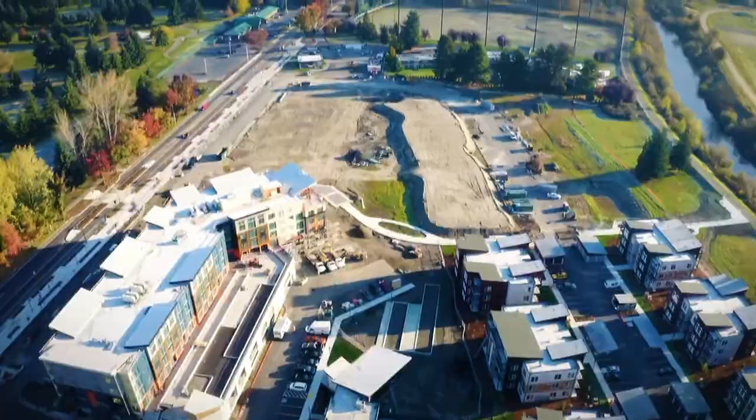Three items on our agenda tonight, and the first one is the Federal Way Link extension. Mark's going to kick this off for us. Thank you, Mark. Ready to go? Yep, let's do it.

Good afternoon, everyone. Mark Madfai, I'm a design engineering supervisor at the city and also one of the liaisons for the Federal Way Link extension. Derek Hawks is my counterpart, here in the audience, and we share that role. Derek is in charge of the KDM area and everything north of 259th, and my area is everything south of 259th, including the Star Lake Station. But I'll be doing the update tonight for both station areas.

The last update we did was back in August. So this will talk about all the progress that's been made since August of last year.

I'm sure you've seen this slide many times. It just shows the overall alignment of the Federal Way Link extension. Starts up at Angle Lake, where it ends now, continues south to Federal Way Transit Center, about 7.8 miles long, 12 minutes on the train. Revenue service opening, this says 2024, that's delayed now. I could talk about that a little more as we get into the presentation, but hopefully it's 2025, but we don't know.

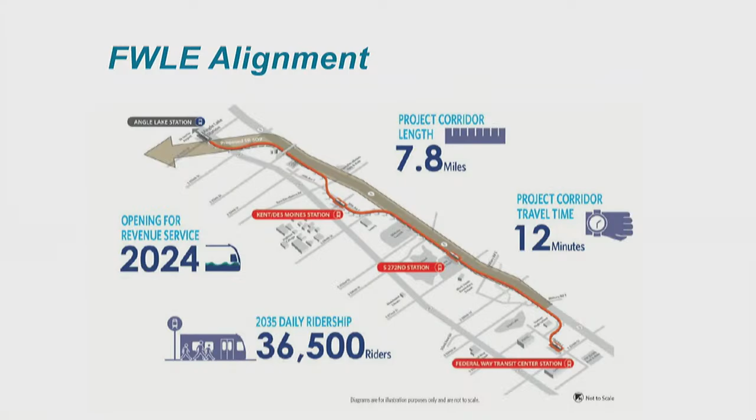Permit revisions. So this is a design-build project, which means a lot of the design and construction is done through permit revisions. Within the permit revisions there's many little design changes, and Derek and I look at those daily. They get packaged into one larger permit revision. There's been 895 for the entire project, about 253 approved for City of Kent so far, and those continue. There's 146 in design in Sound Transit's area, but those will just be continuing until the project is completed.

So I'll start with the Kent Des Moines station and garage area update. Utility work is done, concrete roadway paving is progressing, city streetlight foundations are being installed. The Structure B guideway, which I'll show where that is, the deck is complete, and the plinths and track are being installed. The plinths are the little concrete blocks that go on the guideway that the track is installed onto, which I have pictures of.

Garage railing, interior and exterior finishes are being completed. Framing for the exterior architectural cladding is on, and the canopy is nearly complete. It's got the awning on it, and the elevator shafts are being finalized.

This is just a conceptual drawing that shows the overall KDM station area. North is to the left. KDM Road is over here on the left. These are three new connecting streets between 30th Avenue and Pacific Highway South. There's 30th Avenue, and there's Pacific Highway. And the station area is right along here, along 30th Avenue, and then here's the garage.

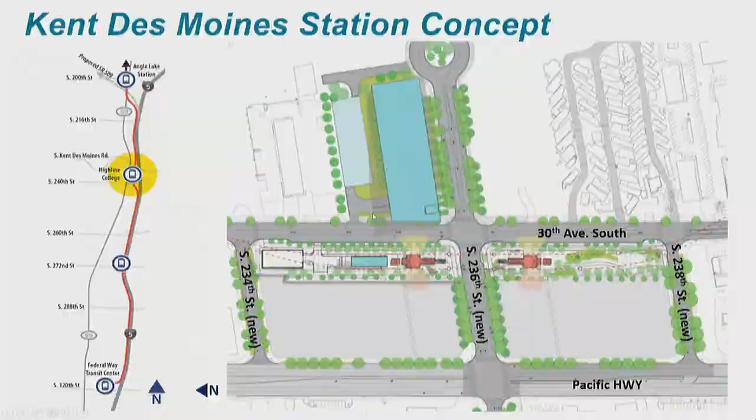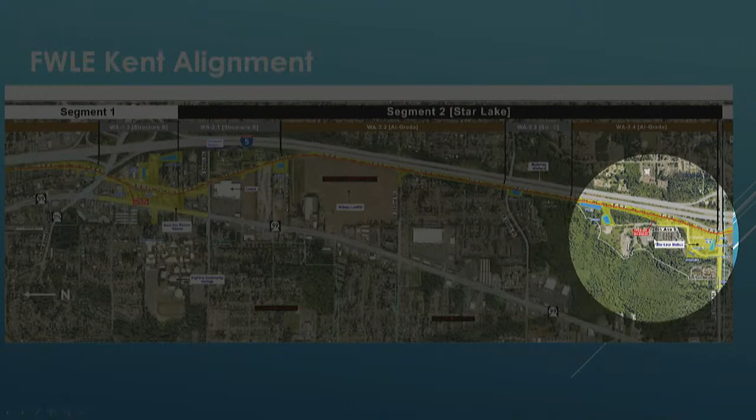This is more of a representation of the Federal Way Link extension through the City of Kent. So this is Kent Des Moines on the north end. Kent Des Moines Station is here, continues down to 272nd. Star Lake Station is right there. And this is Structure B, the elevated structure that goes from Kent Des Moines Road south to behind Lowe's and then up to the Midway landfill.

This is a good before and after shot of the guideway looking north towards Des Moines. On the left was back in August, on the right is January. They've got the plinths, the concrete little blocks, showing up here. On the right side you can see the rails attached to those concrete blocks. Those are installed. They've got those most of the way along Structure B. Track is installed, I think, through the station area. They're getting about 300 to 400 feet of plinths installed per week, so they're making good progress there. The rail is welded in about 80-foot lengths together into about 300-foot long sections, and then they roll it into place with some special rollers. I've not seen it, but it's a pretty big operation.

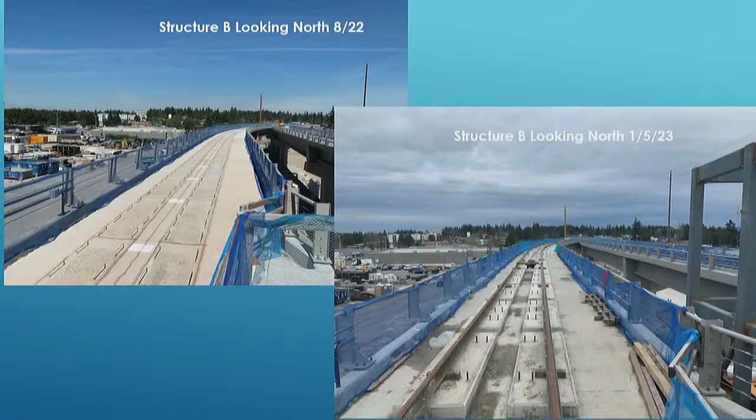There's looking south to the station area. You can see the difference between August and January. They've got the canopy up, all the framing up for the canopy on the approach there.

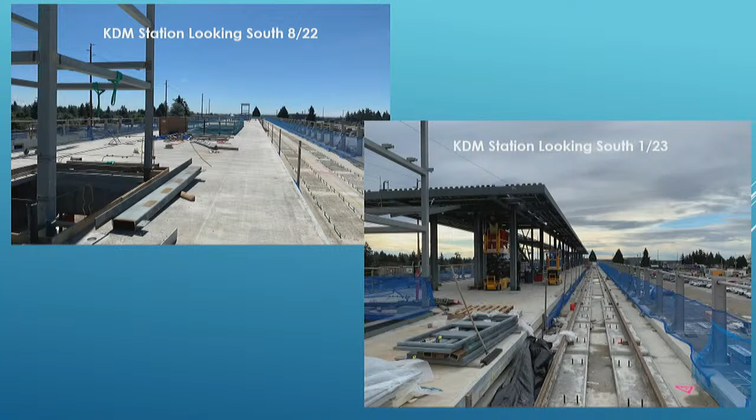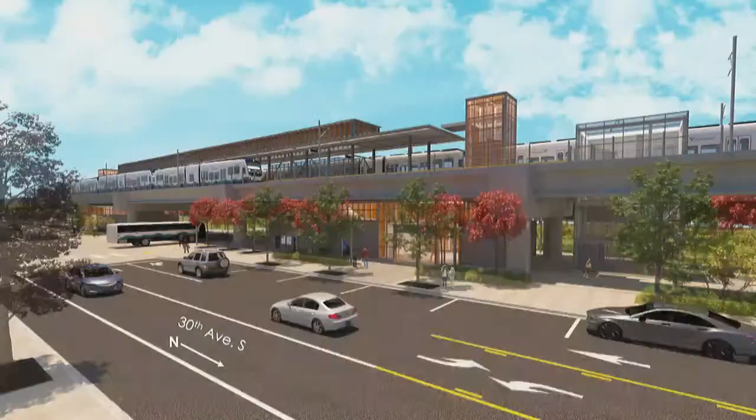And there's a rendering of what the future station will look like, hopefully. If I can go back and click back and forth a little bit, just to give you an idea on how it's coming together. So getting closer.

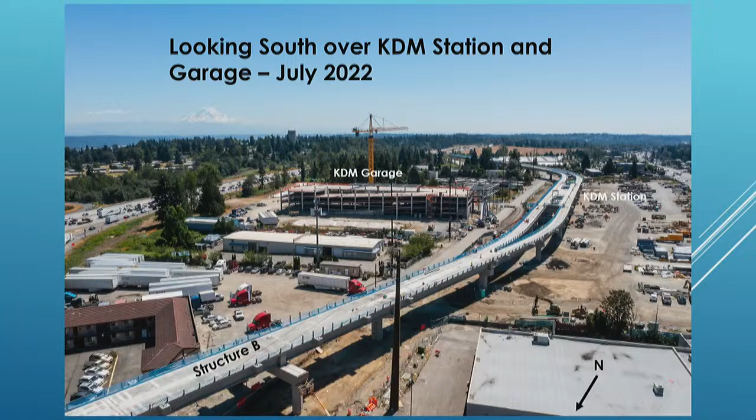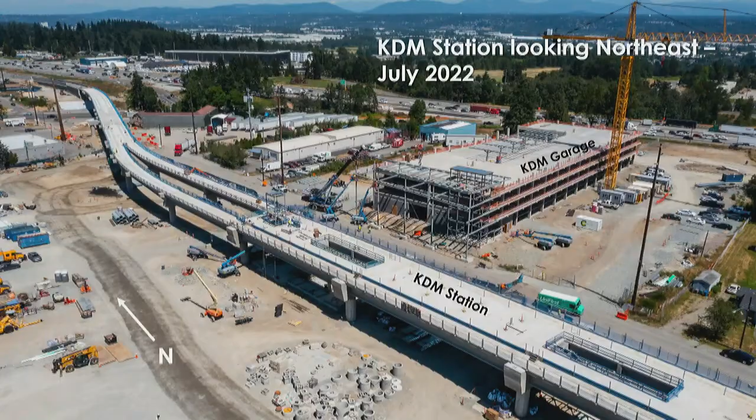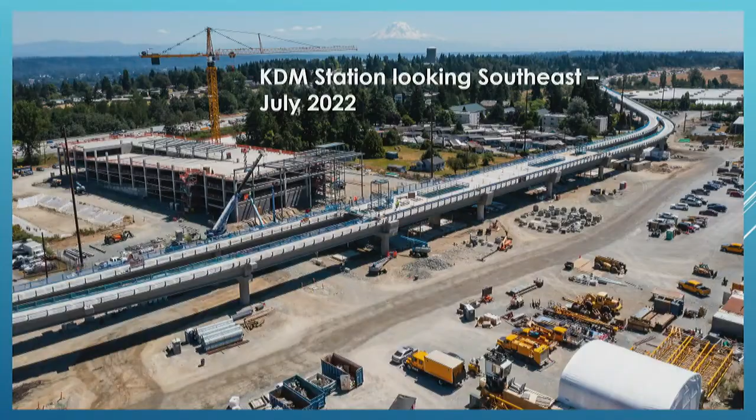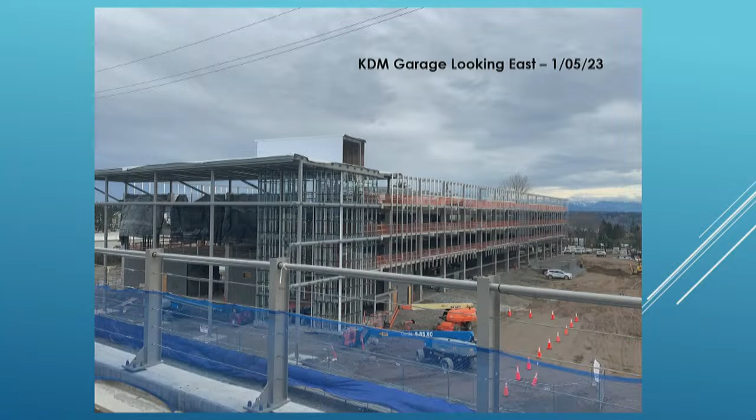And there is a good shot we got from the guideway looking at the garage. As you can see, the elevator glass line around the elevator shafts.

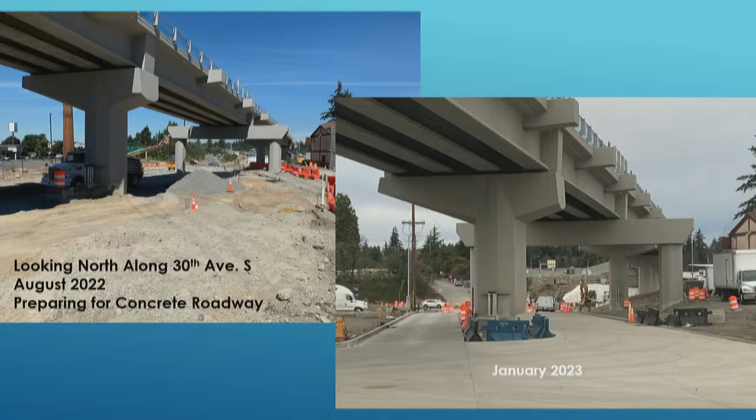Then here's some of the road work. This is 30th Avenue. We're looking north towards KDM Road. They've got the concrete road in place and curb. They're getting ready to grade for sidewalks. Another shot looking north.

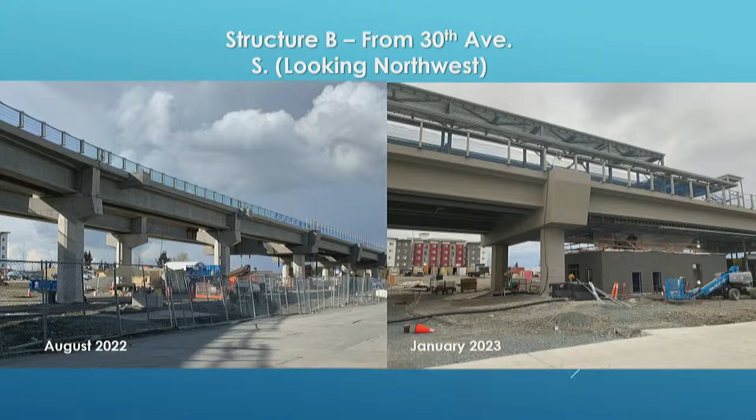Here's another before and after looking west, northwest at the, you see the framing up on top and then the buildings for the stairways up to the station area.

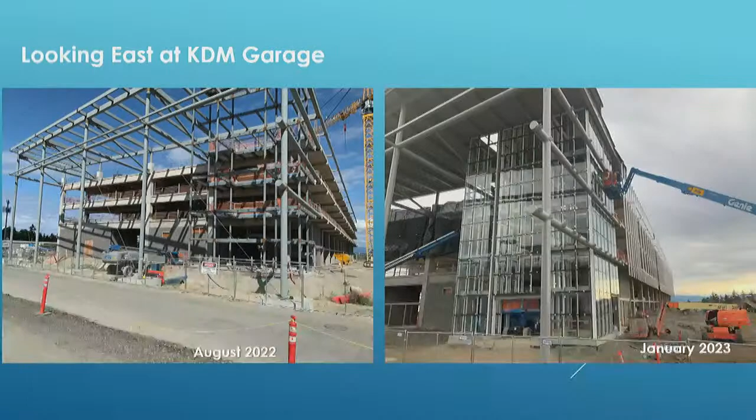So they were planning to do an elevated structure in here. They were working on it, working on access to get to the shafts and columns. They had several blowouts and issues with putting in the foundation pilings and whatnot. They finally had a very large kind of a rotational blowout, a big one, up against the freeway embankment, and it caused them to have to shut off, close a lane on the freeway.

So they finally gave up on that, and they went back to the drawing board and looked at other alternatives on how to get span through this area. And they settled on a long span option, which is a series of like 500-foot long spans to try to span through the area as much as possible. So that's what they are going with, and they're up to 90% now on that, so they're finalizing that design.

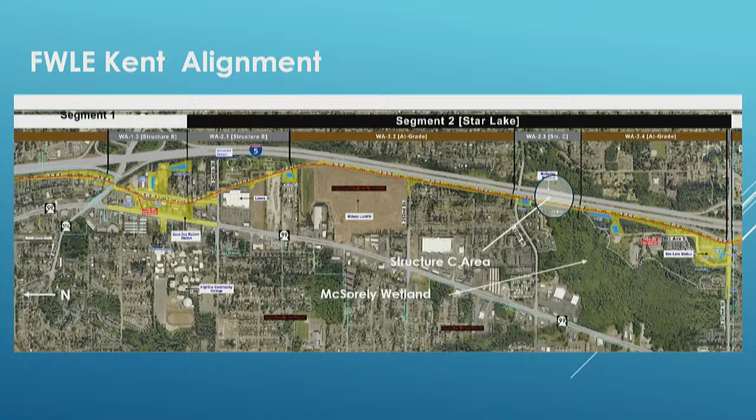And they're also doing work to be able to get access to the shafts and column areas that they need for that, which will be much less than what they needed before. So that is really the Achilles heel in the whole Federal Way Link Extension project that's causing the delay. They're working on it as quickly as they can, but we don't have a new timeline yet. So once we get something, we'll certainly share it with everyone.

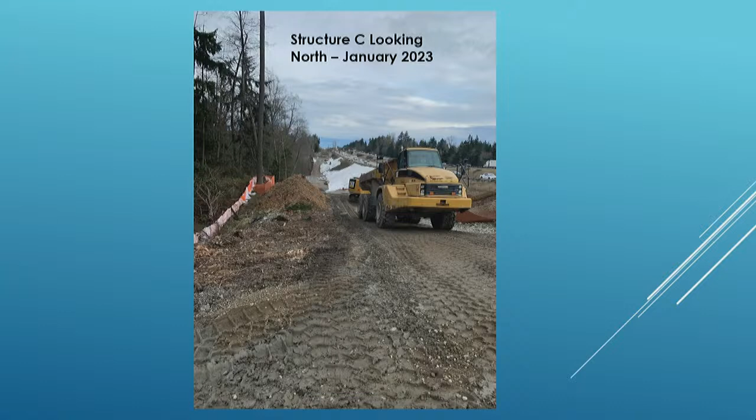This is a shot looking north on Structure C, just recently. And then one looking south from 259th Street. And you can see they've already got a wall constructed here for one of the shaft locations that they need to get to.

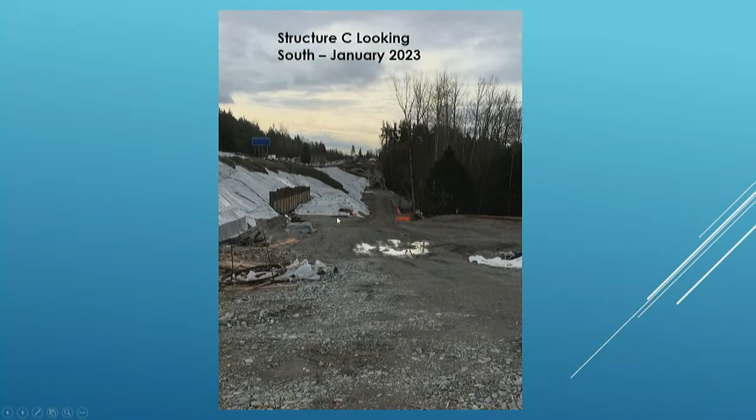So update then on Star Lake Station. Concrete road paving and walls are getting installed along 272nd. Star Lake Garage, the 5th and final floor, concrete is being poured. The station walls are complete. Backfilling is complete between the walls, and they're starting to form and pour the platform areas. The Structure Z bridge across the street is complete and ready for track installation.

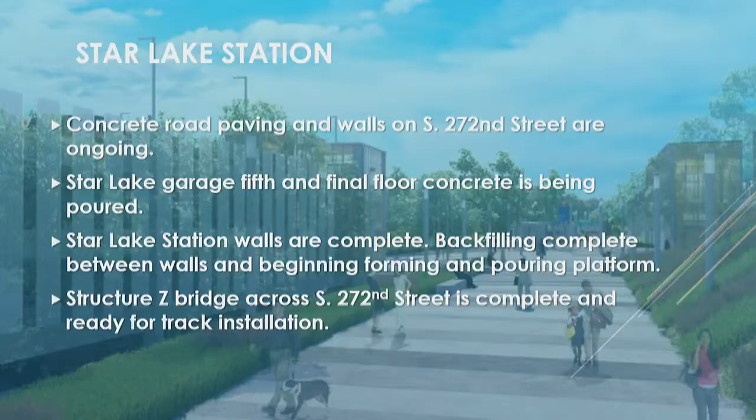There's a concept again of the Star Lake area. I-5 north is to the left. I-5 is right up here. This is the southbound exit onto 272nd from I-5. 272nd is here. 26th Avenue curves around the west side of the station area. And then the station is located here, and here's the parking garage.

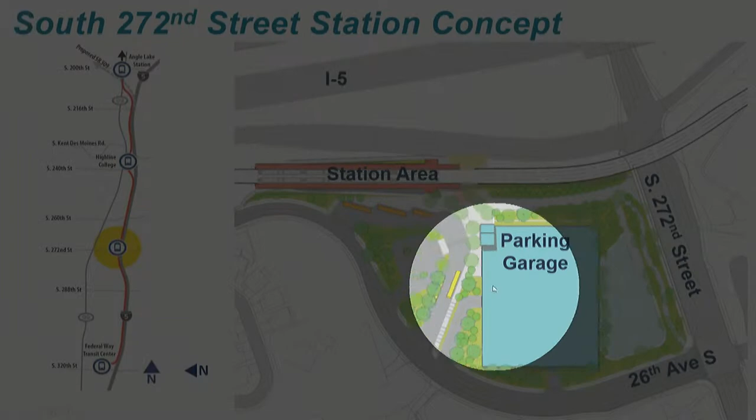And then there's a recent drone picture from just a few weeks ago. So you can see how far along the garage has gone. There's the station here in the background. And then you can see the paving done along 272nd here.

And here's a recent one here. So you can see the garage is much further along. They're just pouring the final floor, the 5th floor. The station area is all filled in, and they're forming and pouring the platform for that. There's just another one looking to the north.

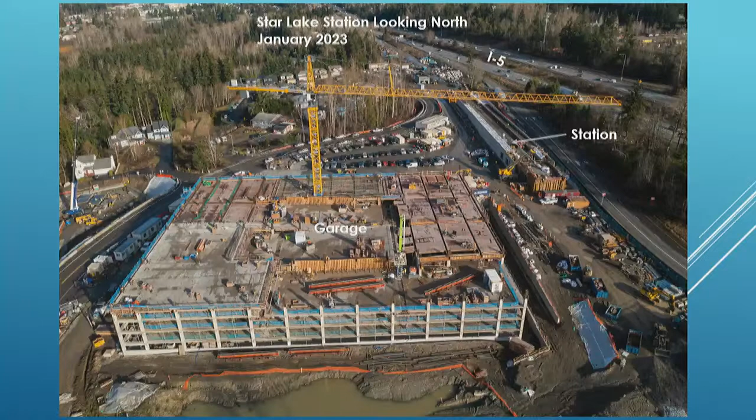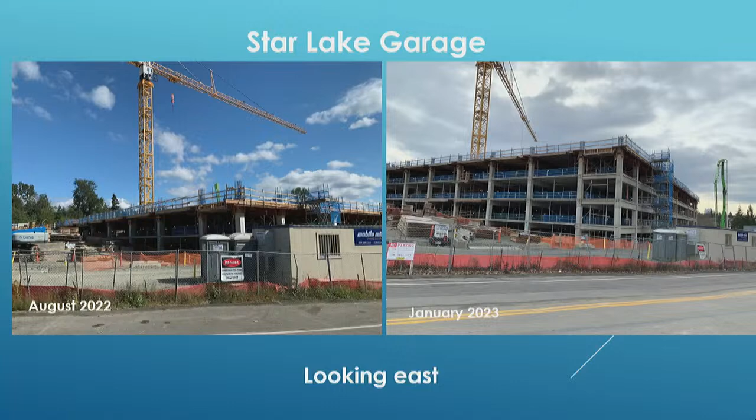Here's a good one, before and after on 26th Avenue, that really shows the progress on how far they've gone up with the garage. And then there's one from the east side of the garage looking southwest.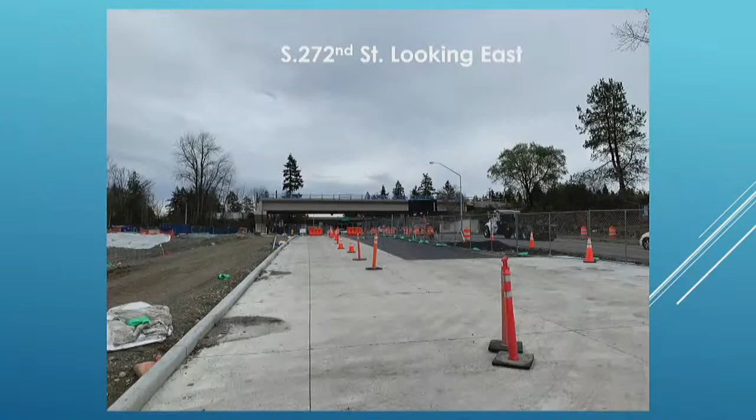And then this is looking east. You've got a lot of the concrete paving, curbing and grading for sidewalks. So they'll get this side of the road done and paved up, and then flip over to the other side, flipping traffic back onto this side. So they've still got quite a bit of work to do. It's going to be kind of messy traffic-wise for a while, with periodic road closures, but making lots of progress.

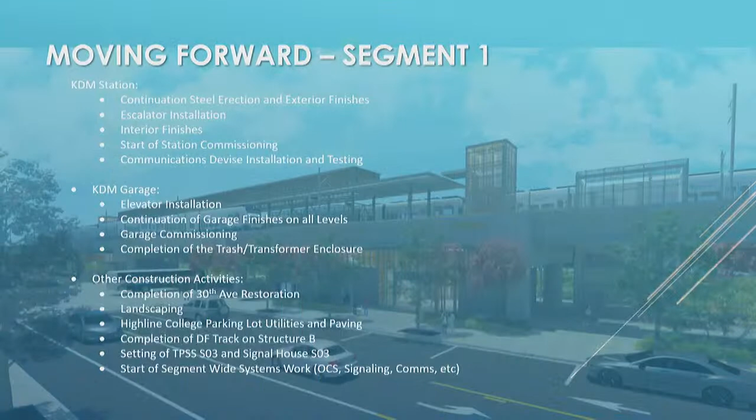Pretty cool. So moving forward on segment 1 on KDM, continuing with the steel erection and exterior finishes on the station, escalator installation, interior finishes, start of station commissioning, which is all the testing and adjusting and all that stuff to get it final per specifications, communications device installation and testing, which is what communicates the track and the train together.

At the garage, elevator installation, continuation of the finishes, commissioning of the garage, completion of the trash and transformer enclosure, and then other things, completion of the 30th Avenue concrete roadway, landscaping, Highline College Park, parking lot utilities and paving, completion of track on structure B, setting up the TPSS and signal house, and then start of segment-wide systems work.

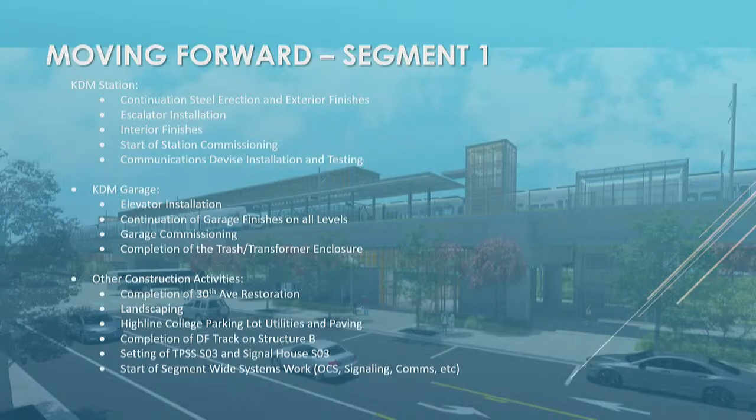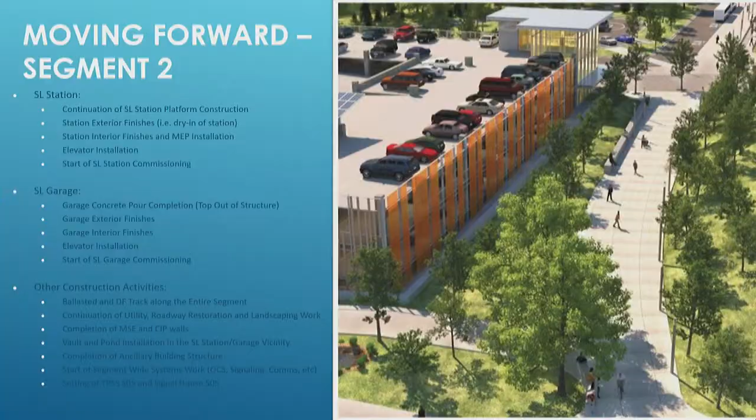These are the mitigation projects. I talked about these last time. These are traffic mitigation to mitigate for all the traffic impacts at the station, the additional traffic at the stations. There's 4 identified. There were 5, 1 dropped off, but we have Pac Highway and KDM Road, Military and Reith Road, 272nd and Star Lake Road, and Pac Highway and 272nd.

And those are at 90%. We're just doing the final review, 90% review on those. They've already started right-of-way acquisitions, and so those need to be complete prior to revenue generating completion of the overall project.

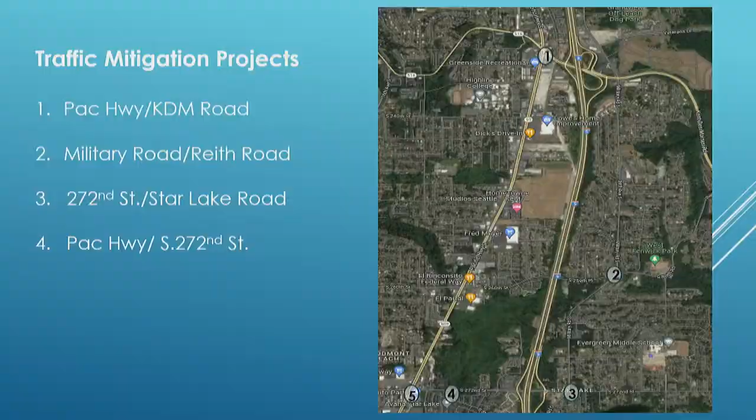So that pretty much sums up the update. We don't know when the new schedule will be, but hopefully they'll be providing it soon, and we'll be sharing that with everybody once we get it.

Thank you, Mark. Great presentation. This thing's really coming along. You know, it really seems like all of a sudden it's almost here. And I definitely like seeing KDM on the name. That's pretty awesome there.

Council member, any questions, thoughts, concerns for Mark? Good job. And I won't call you Derek again because you don't look alike, so I apologize for that. Okay, that's twice I did it. I won't do it again.

Thank you so much, sir. Appreciate it. Great presentation. There's also a drone flyover that we'll send you that Sound Transit's done for the whole thing. It's really cool to watch, so we'll send that out to everybody. Please do. Thank you so much. Thank you. Okay, all righty.

In general, we spend a good deal of effort to understand, anticipate, and be competitive for the grants process, which is reflected in our everyday efforts and policy documents, including the Transportation Improvement Program. So in a word, how did we do in 2022? We did great. The gray map on the left represents what is in our TIP projects, and we spend a good amount of time trying to light up those projects with funding. The summary of all the projects on the right is represented in neon colors on the left as we light up those projects with funding.

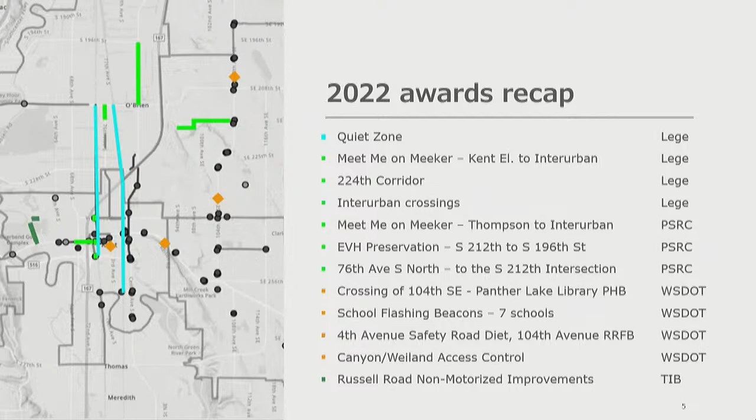The competitive project grant awards on this list represent just shy of $10 million of competitive grant awards. That represents a total of a little over $13 million of projects that we will be delivering as a result of these grants and leveraging $3.3 million of local funds. Then the legislature adds on top of that. These projects represent a mix of multimodal corridors, completion of corridors, safety projects, and preservation projects.

Just highlighting two from this project list that are perhaps a priority for the council that we've heard about in the past: the Quiet Zone at the top of the list, which you'll receive an update from Rob shortly on, as well as the Meet Me on Meeker project, listed twice—both a legislative appropriation for the segment of Kent Elementary to Interurban and Thompson to Interurban, both the legislature and the competitive grants for PSRC—and we'll go into a little more detail on those.

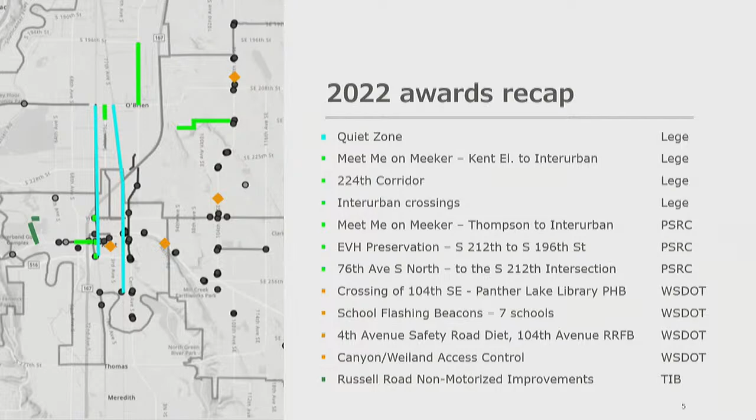So I want to pause here and really acknowledge and give credit to both the leadership of this council, as well as my predecessor and the strengths of the community to see all of this on one slide. It's hard to overstate the level of effort, preparation, commitment, dialogue, and conversations that went into making this a success for 2022. So I definitely want to pause and acknowledge that.

The community conversations that this organization went through, the folks at this dais went through, and the folks that participated in the TMP around transportation, including some hard conversations, really shine through in this list, as well as the participation and leadership in the regional transportation, as represented by the leadership on this dais, including the goals-based transportation plan, prioritizing those projects. Some of those were hard choices and trade-offs, but since they were goals-based, those goals track strongly with the scoring processes and what's incentivized from a funding perspective, and you're really seeing those in these results.

I also need to share some credit with departmental collaborations, both economic and community development, parks departments, the police, including matching the applications to the criteria.

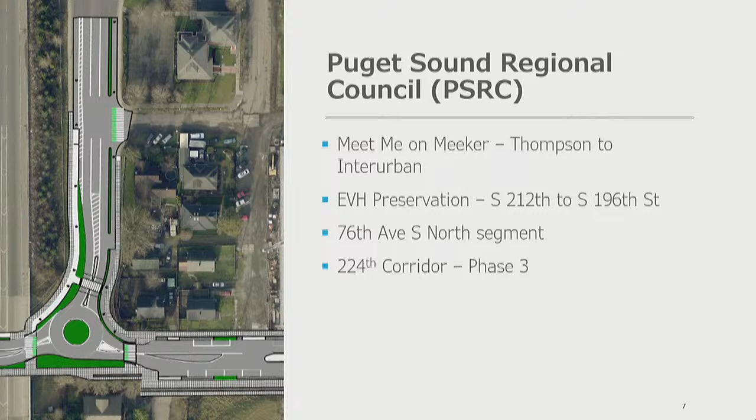Washington Department of Transportation, WSDOT, we were also very successful this year with a number of grants. These are spot location improvements. Really, the story with these projects is that most of them are safety-based and needs-based, which has to do with the city of Kent doing our homework. A presentation y'all heard, I believe in March, from our traffic engineer on the local road safety plan, and then submitting that to WSDOT really allowed us to compete on a more quantitative and stronger basis for safety-based projects, and then work with our partners at WSDOT to see them permitted and come to fruition.

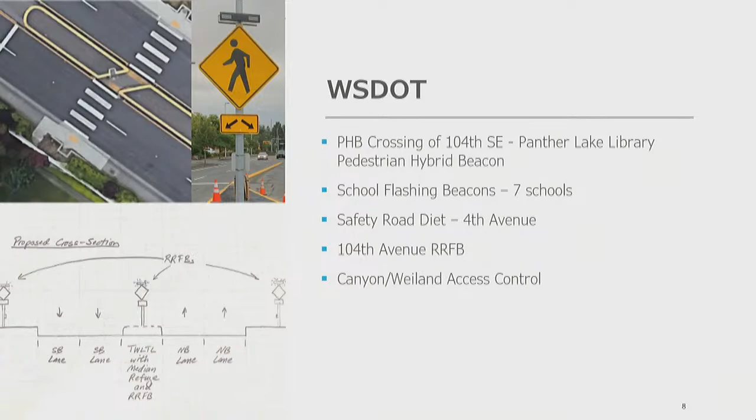Hey, David, Councilmember Thomas, I have a quick question. Just real quick, and I'm sorry I'm ignorant on this one, but what is the 4th Avenue Safety Road Diet?

So one of the concepts that we're still working through, and perhaps it requires a little bit of extra analysis, is adding a little bit more space for pedestrian crossings by narrowing up the crossings, perhaps using a lane south of... I'm going to get the details wrong, Gal, if it's all right, can we come back with a little bit more?

You can phone a friend, too. I think what you're saying is you're narrowing it, using the word diet.

Is that correct, Chad? Yeah, we're looking at narrowing up 4th Avenue between Willis and northbound all the way through Smith. And then we're looking at options at narrowing particularly one southbound lane between Smith and James, but we haven't got there yet. We're looking at needs with regard to both Kent Station and Showare, making sure we don't have issues getting people out of Showare when we have some of the big shows. But day in and day out, if you do much walking out on 4th, narrowing up the road itself and providing a little bit of buffer for people walking up and down the road would be a nice addition. You're pretty close to traffic as you're making your way through there.

Thank you. Thanks, Chad. Excellent question. Thank you. Any additional questions about the WSDOT projects? I think we're good.

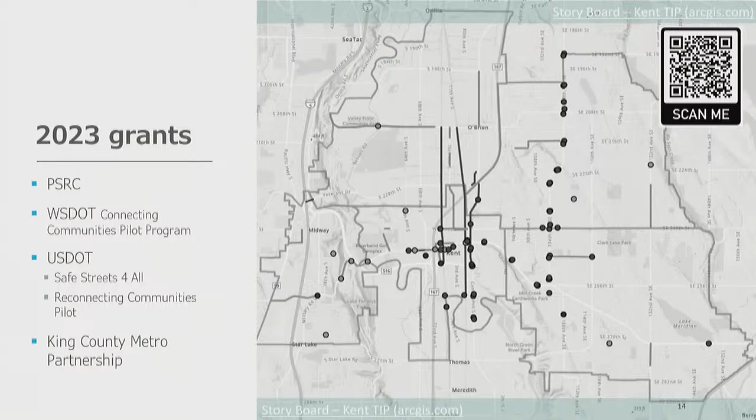The first project call is from PSRC, and there are two potential nominated projects for this, but you'll see four dots. The first is pretty straightforward.

We have one remaining section of Meet Me on Meeker that we've been applying for and will continue to apply for, not included in the state legislature's funding bounds—that's the intersection of 64th Avenue multimodal improvements along the frontage of Kent Elementary School. We propose to continue to apply for that one.

The second is a bit unusual, in that we believe there's going to be a pilot program through a PSRC funding call, but we don't yet know the criteria. So we've nominated, or are looking at, three different potential projects from the TIP that are already in it.

Those include 83rd Avenue, closing the sidewalk gap from 228th to 224th, which also ranked very highly in the Transportation Master Plan outreach.

A rectangular rapid flashing beacon on Military Road—there are three of those in the TMP, so we'd propose to move one forward. We think the funding would be able to fund approximately one of those, if we're reading the tea leaves just right.

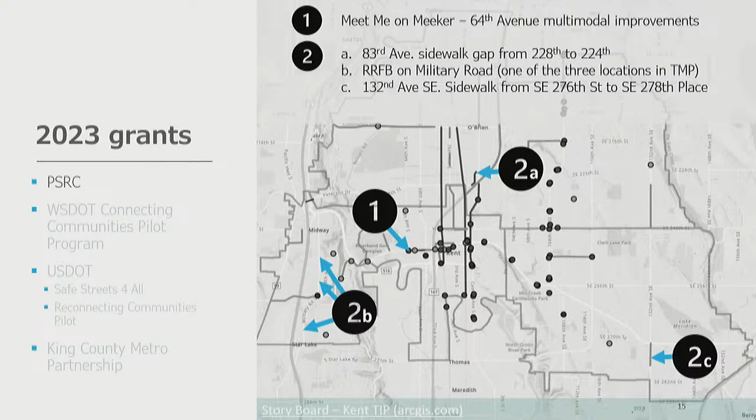The third is a sidewalk project on 132nd Avenue Southeast, from Southeast 276th Street to 278th Place. That one's nearing completion for construction, so we're looking to construct it.

And then, of course, we'd bring back the nomination for whichever one once we do have the criteria, for recommendation and referral to the Public Works Committee.

The second one is also a bit unusual for 2023. The state legislature directed WSDOT last year to begin a pilot program called the Connecting Communities Pilot Program.

WSDOT turned around on a short timeline because they needed to report back progress this year. They took projects from our multiple grant program applications across statewide jurisdictions, culled them through their criteria, and one of our projects hit all the marks. They reached out and nominated one of the projects we had submitted for another program. We're proud to be one of five municipalities statewide nominated for that. It's not inked yet, it still has to go through the legislature.

That's a project out of our Highway Safety Improvement Program, part of the local road safety plan presented to a council workshop in March. It includes the Willis Street rectangular rapid flashing beacon at 2nd Avenue Southeast, and a safety road diet on Central Avenue, which would improve the crossing of Willis Street at 2nd Avenue.

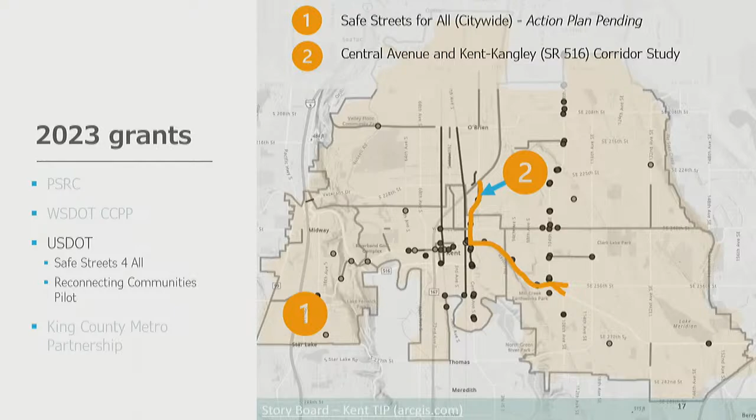So with number two, when you talk about the corridor, are we talking about Central and 516 and up - all the way up? All the way up to the Y at 256, then Kent-Kangley Road. So the tip there, that's the Kangley Y up there. Okay, because we did a lot of work on that road - it is really bad.

We're looking for assistance and guidance to help us look at some of those issues. This next opportunity represents an ongoing partnership between King County Metro and the City of Kent - opportunities and issues identified through the Safe Access to Transit study completed in 2020. You'll notice a lot of these overlap with locations on State Route 516, so whenever we can, we try to find overlapping efficiencies to look at issues from a workload standpoint, funding standpoint, and community involvement, to the extent combining these things helps.

You'll notice a couple of these items are grayed out. That's because that list was developed in 2020 and was largely surrounding the future I-Line project. Some of those solutions have already been found through the development of the I-Line program. Again, you may start to hear the drumbeat of the local road safety plan, which has funded another one of the improvements along there.

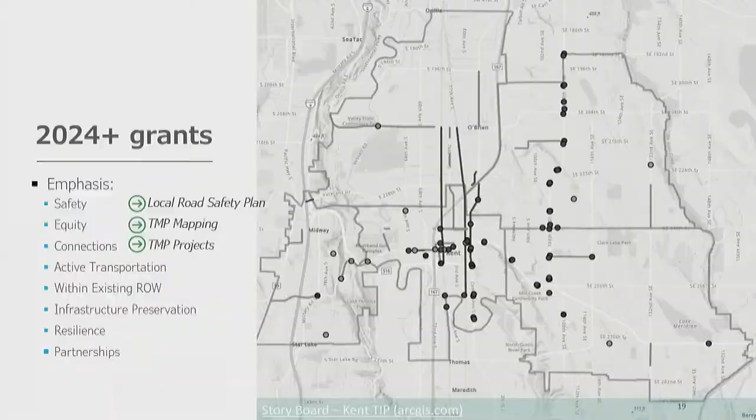So with that, as our leadership and core stakeholder for the City of Kent, the council represents a continuity of those conversations and of course our authority.

What else should we be considering as we compile projects to nominate for the grants and for the TIP update? We know safety is going to be a big issue, continuing, and we're looking for funding opportunities for that.

Is there a gap we should be focusing on, or a program or project now and later in the process? Are there any projects or programs that y'all would like to see us adding to the TIP?

With that, we're happy to take any questions that y'all have, or we will look forward to seeing y'all next time with the draft TIP.

First, I want to say, great presentation. How long have you been with the city? About 9 months. Wow, good job. I really enjoyed your presentation.

Thank you very much. And we need to keep in mind there's a lot of pre-work that goes on before some of these projects happen. I think we are very fortunate. I want to give staff kudos for really being visionary, being able to see what's coming, and when the opportunity comes, we are ready to go.

I just want to say kudos to our staff, excellent job. And then my last comment, really around Kurt and Chad - I used to associate this project with you, Kurt, but Chad, I'm going to pass the baton to you. So 'meet me on Meeker,' that's Kurt. So he kind of lost his kudos. Good job, but Chad's going to close it up for us. Hey, great presentation.

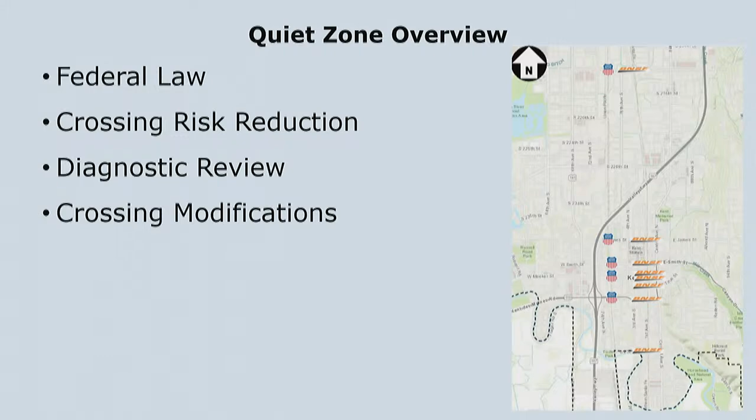Just a quick overview of the process. Quiet zones are established through federal law. The federal law establishes the minimum requirements for a quiet zone, but it also requires us to conduct what's called a diagnostic — an expert panel consisting of people from the city, the railroads, the Utilities and Transportation Commission, and the Federal Railroad Administration that visit each crossing and determine what additional crossing improvements need to be made in addition to those federal requirements. Following that diagnostic, the city then gets approvals from the Federal Railroad Administration and from the Utilities and Transportation Commission. That's then followed by construction projects and the establishment of quiet zones.

Overview, legislative appropriation. We were the recipient of a $3 million appropriation from the state legislature last legislative session. I want to read this out of the law because it is really great: operational improvements and other actions to improve safety and reduce train noise, with the goal of increasing quality of life and facilitating transit-oriented living in downtown Kent. So that's awesome, that came with $3 million. That's administered through the Department of Commerce. Once they take their administrative fee out, that leaves the city $2.95 million available to make railroad crossing safety improvements to work towards the quiet zone.

This is part of the 2022-2023 state operational budget, so the funds expire on June 30th, 2023. So we've got a little less than 6 months left to spend those. Those funds can be used for design as well as construction towards crossing safety and the quiet zone. There are some requirements that came along with that — one is a cultural resource assessment, which is something we typically don't do, but that has been completed. Right now we're still working on formalizing the agreement with the Department of Commerce so we can start receiving that money, but they've assured us that all the work we've done up to this point will be eligible for funding once that agreement is in place.

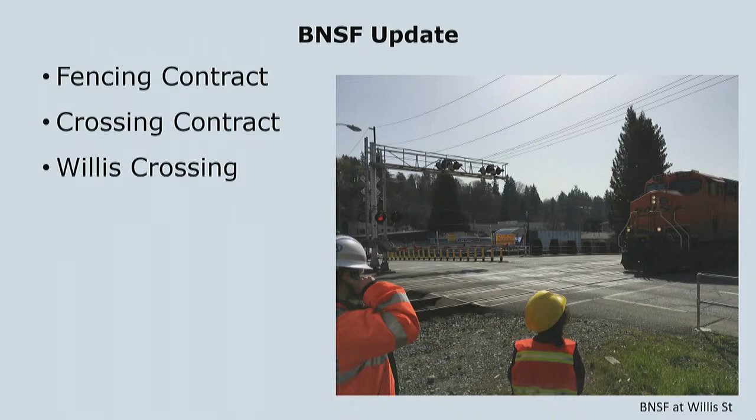Two contracts have already been put together. There's a fencing contract — part of the requirements to establish a quiet zone is to install anti-trespassing fence. Our design, survey, and construction teams worked together to put together a contract to install some of this fencing. There's about 1,800 feet of fencing that'll be installed north of James Street on BNSF. Then south of Willis Street, there'll be about 1,300 feet installed on the Railroad Avenue side, that's the east side, and 1,400 feet on the First Avenue side. That contract has gone to ad, and we've received bids, so good news there.

We've also got a crossing modification contract that went on ad today. This will modify 7 of the 8 BNSF crossings, which I'll get to in a second. So this will get us a long way — it's probably 75% or so of the improvements that we will need to establish the quiet zone on BNSF.

The one remaining is Willis Street. This is also State Route 516, as you're aware, and that requires approval of the Washington State Department of Transportation. So we're in the process of hiring a design consultant to help us prepare all of the documents and plans that are required for that state approval.

That'll be a little process in itself. And then the part I know you're all waiting for is the schedule. So I've simplified it. It used to show months, and I decided it probably wasn't great to show 48 or 60 months worth of little tiny cells, so we're going to do quarters this time.

So here's the BNSF schedule. We've got the FRA reviews still in process. Under that's the legislative appropriation, and we're showing we've got 2 quarters left of that. And under that, the fencing contract and the crossing modification contract that I mentioned.

One of the requirements to establish the quiet zone is to upgrade those flashing lights at each of the railroad crossings from incandescent bulbs to LEDs. So we're working with BNSF to try to enter into a contract to have them do that work before that legislative appropriation funding expires.

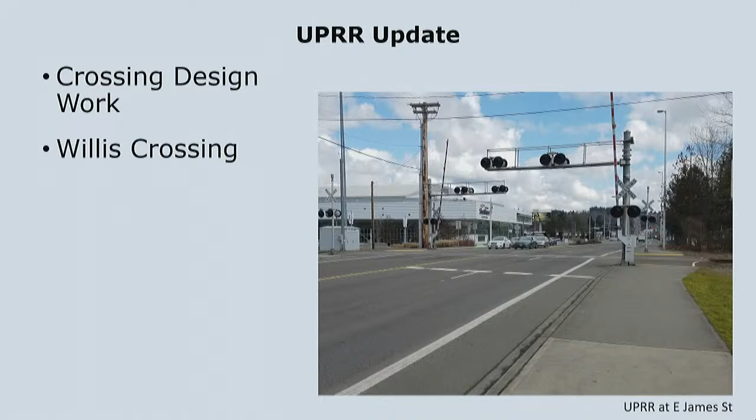And then Union Pacific schedule, again, still working through the FRA approvals, the legislative appropriation, crossing design. The line below shows the crossing designs continuing in parallel with the Willis Street design approval. Hoping to get those by middle of next year, and then we'll do the contract with the railroad to do those crossing modifications, and then relocating the gates at Willis Street.

Union Pacific's telling us now that it takes about 4 months to get an agreement with them, and then at least 18 months for construction. So there'll be some railroad work. Also below that, we're showing the city's crossing modification contract, also planned to start in the third quarter of 2024. So given this timeline, notice of intent and the quiet zone hopefully established in the fourth quarter of 2025.

This is a little quicker than we showed in the last schedule last year, where we showed the middle of 2026. But again, we've got a lot of momentum with this commerce funding and the work with the railroad, so we're really excited about that.

And with that, that's the end of my presentation. I will be happy to answer questions.

Great job. This is going to be a job security project for you, right? Once we finish, you'll probably be eligible for retirement by then. It's only 2 years from now. We'll see - I'm not talking about us, I'm talking about the people we have to deal with. So hopefully, we'll see. Great presentation. Thank you so much. Any questions, comments, council members?